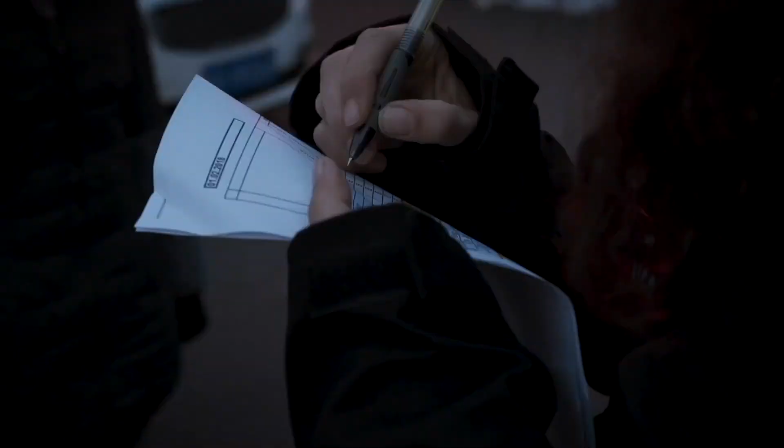This new area will include 17 buildings. Some of them will go to JNBY, a famous Chinese fashion brand. Others to Goa, a large architecture studio. Both companies will move their headquarters here.

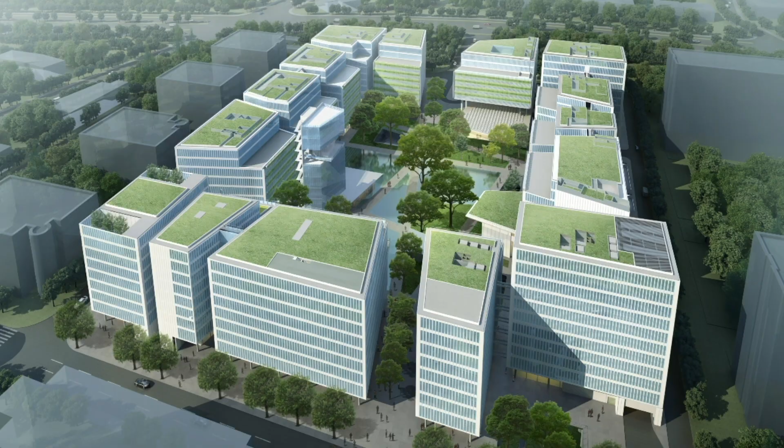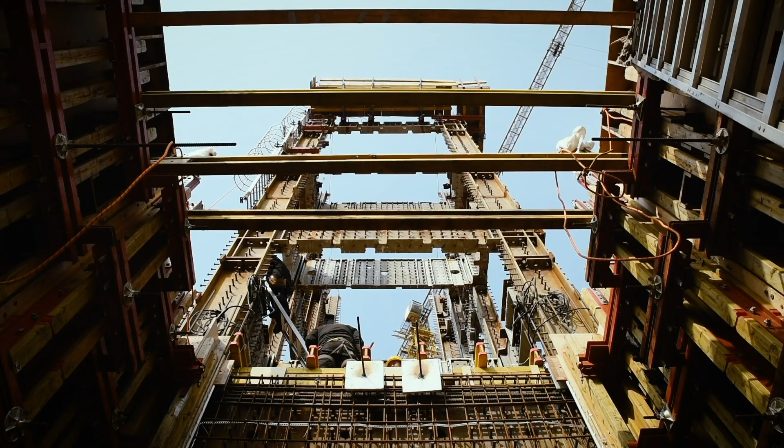I really appreciate Renzo Piano's architecture. That's why I immediately thought of him. Renzo Piano suggested using concrete for the core buildings. However, we were concerned about the quality of Chinese concrete. It was then that Renzo Piano came up with Pietro Dottor. He also said that we would meet a true maestro.

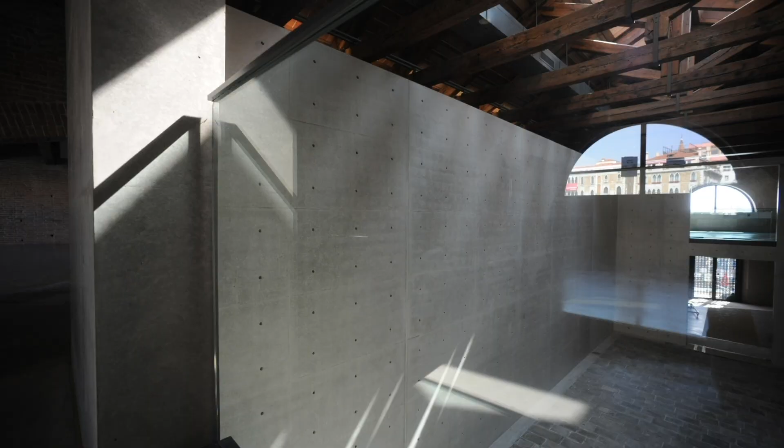One of the main features of this project is the construction of a huge architectural concrete surface. Architectural concrete is a type of architectural wall whose finished effect is visible. It was a huge challenge for Dottor Group, as the quality levels requested for this project exceeded those of the Kimbell Museum and Punta della Dogana. Moreover, Dottor Group had never carried out such a large project in the past.

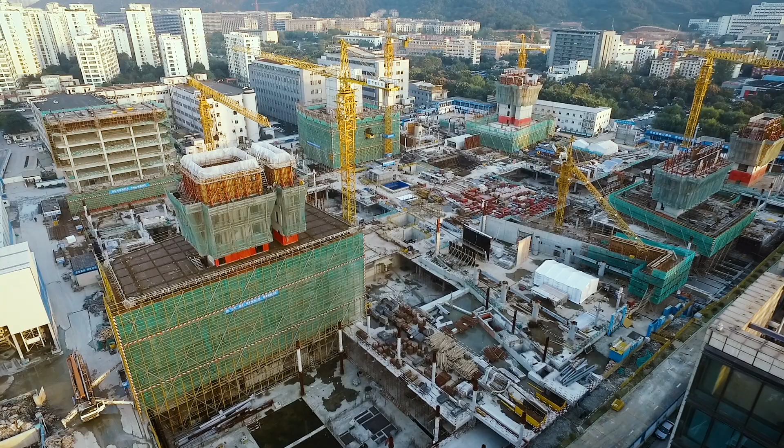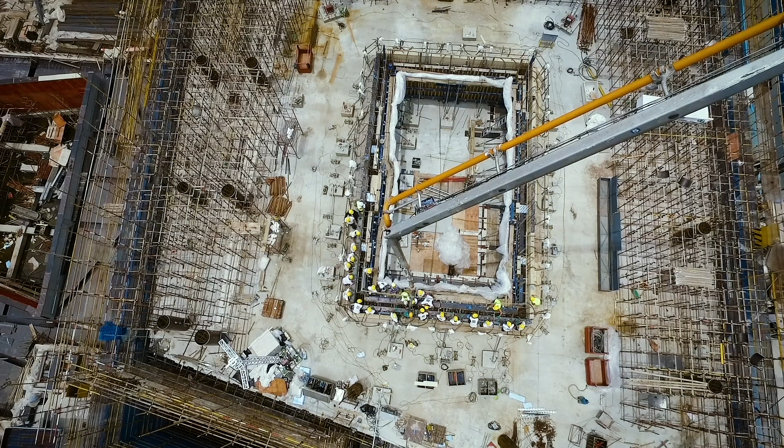In particular, this project included architectural concrete walls for a total surface of 40,000 square meters. Dottor Group had made walls measuring about 4,000 square meters, but definitely not 40,000. This was not only a matter of mere quantity. The key factor was that a 10 times bigger project comes along with a much bigger organizational challenge.

We normally operate as general contractor to manage our projects. For this one, I needed to work with my own people. We are the biggest Italian expatriate community in China, 110 men and women. We rely on more than 20 Italian Chinese translators that support our staff on the building sites.

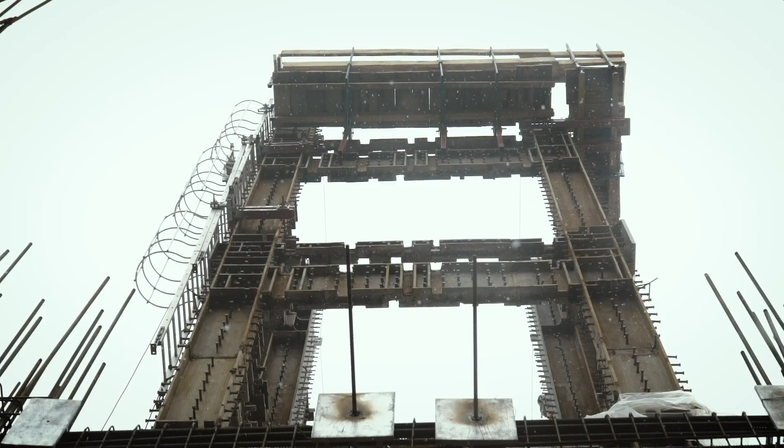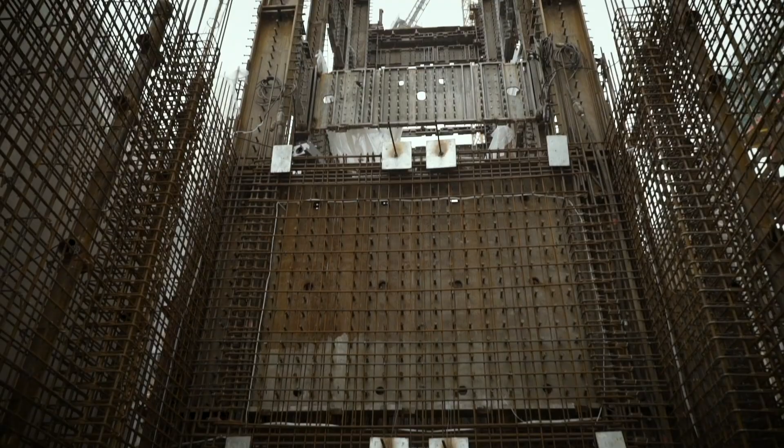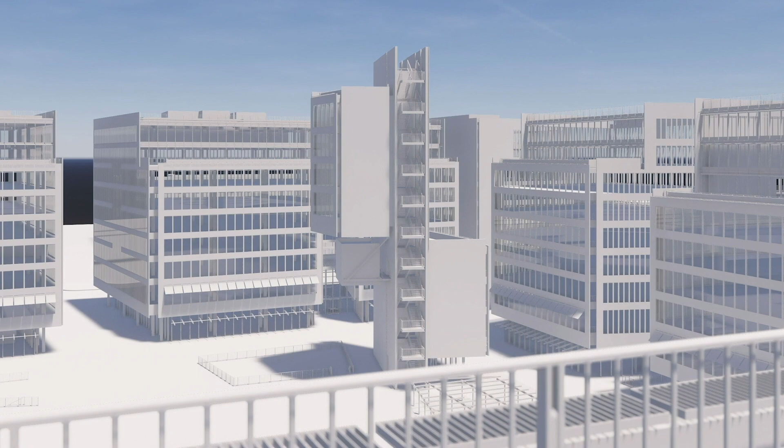From a technical point of view, I think the biggest challenge is Core E. Core E features the most complex building of the entire project. A central core sustaining a cantilevered structure consisting of 4 stories. The cantilevered frame rests on the walls of the central core. Therefore, it's vital that these walls withstand considerable traction. Since concrete has a low traction strength, we had to add quite a lot of steel to Core E.

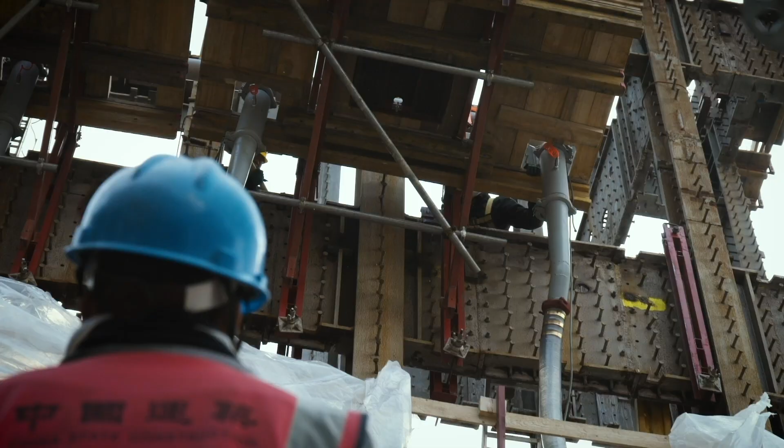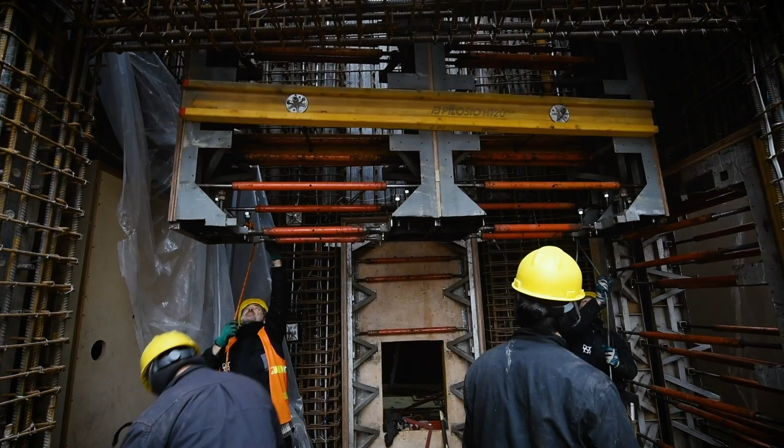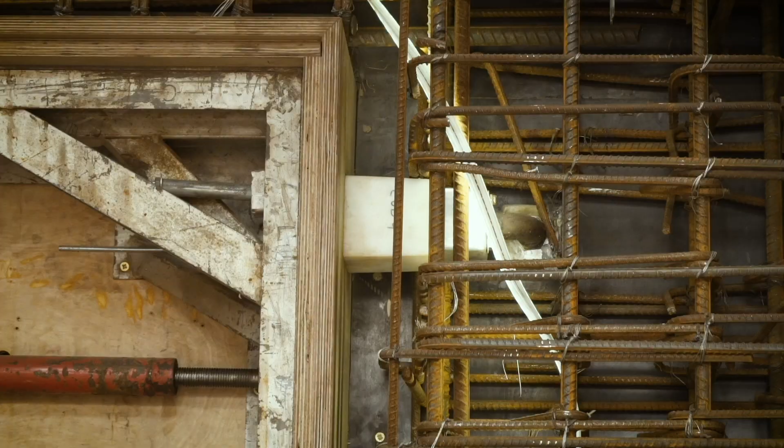This type of steel structure is very common in China. As for the exterior, architectural concrete was chosen. This was in line with the requirements of the architect and to achieve better consistency with the rest of the project. The Core E project presented a unique contradiction: a steel frame on the inside and architectural concrete on the outside. In the concrete, there are several elements: the steel structure and the reinforcement, as well as the spaces for the needle vibrators. Our engineers and structural engineers are working together to overcome this contradiction.

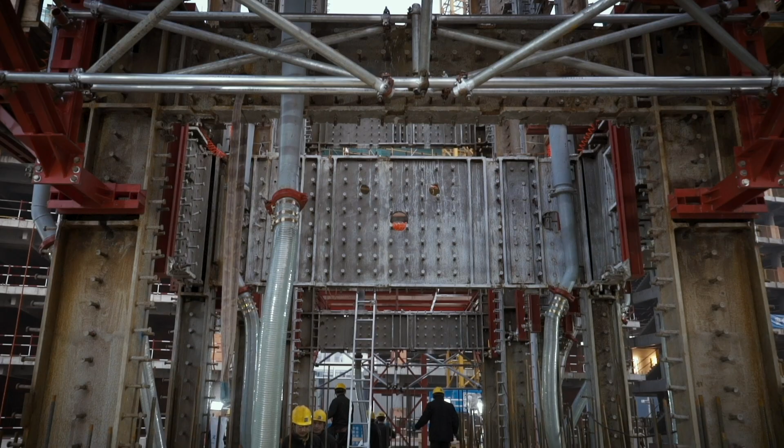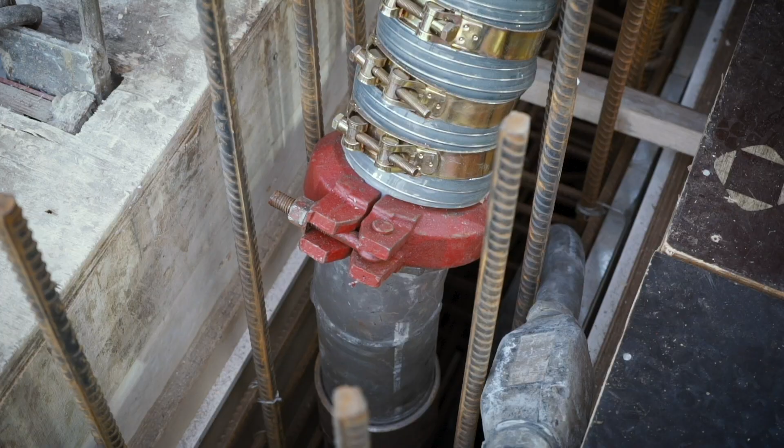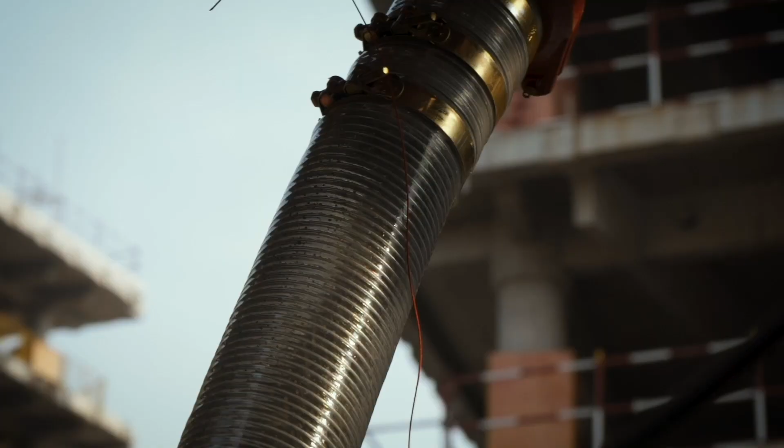It's a very difficult core. We're going to pour 150 cubic meters of concrete in one go in 3 hours. To do this, we had to patent a pouring system with pipes leading into the formwork. This allows all the concrete to be poured in one go, at the same rate all along the 70-meter-long perimeter of the building. The idea is to avoid all joints in the structure. Such challenges made for a very delicate and difficult task.

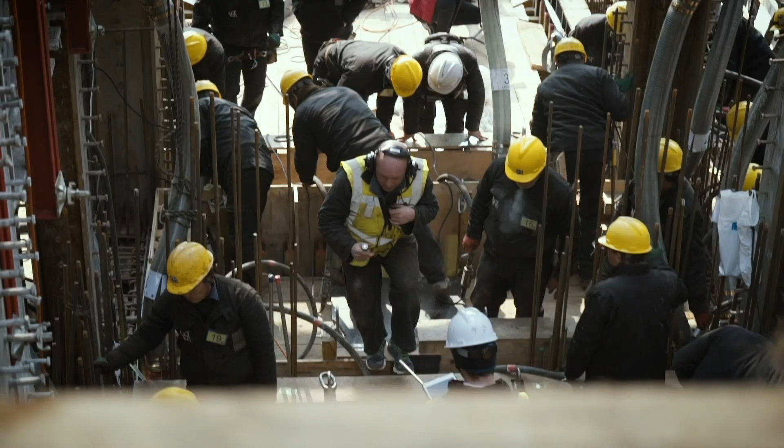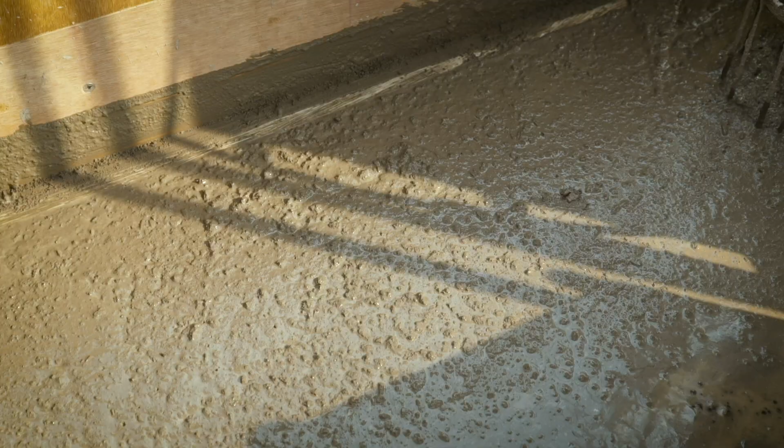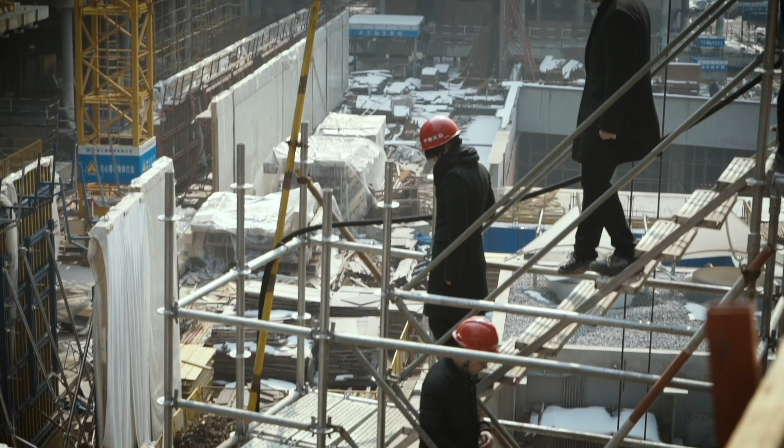Pietro is an interesting person and a friend. In Hangzhou, in these 3, actually almost 4 years, we studied and worked together on many aspects of this project. Pietro is very creative. He always comes up with lots of ideas, which he is eager to test. He is not scared of taking risks. I really like people like him.

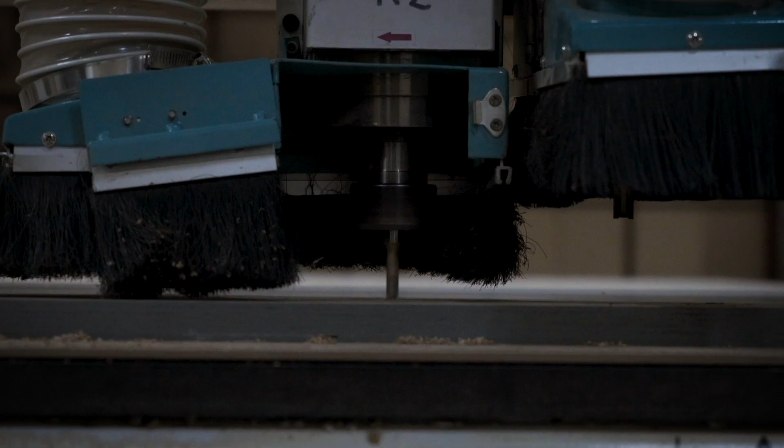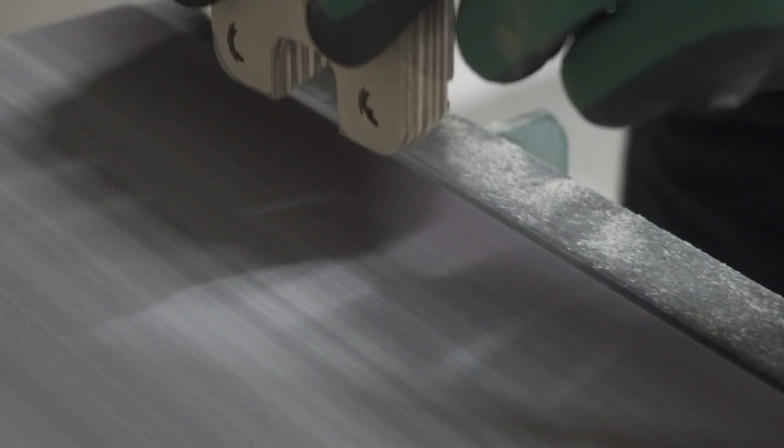The moment we take down the formwork, the whole thing is finished. No plasterers, painters, or upholsterers. Nothing else to be done. The wall will be completed. I think quality has much to do with beauty and attention to detail. Our background is restoration, that is both artistic and architectural restoration, anything that has to do with culture and history.

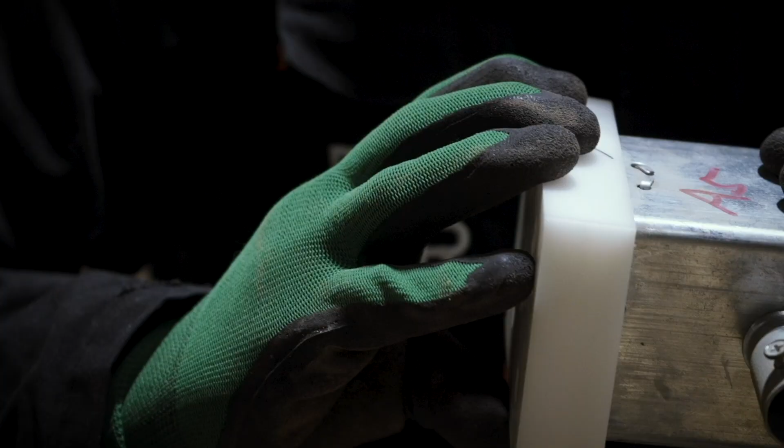Making something that requires so much attention is a very long process. Hundreds of elements working together. If one of them is off, the whole castle will come down.

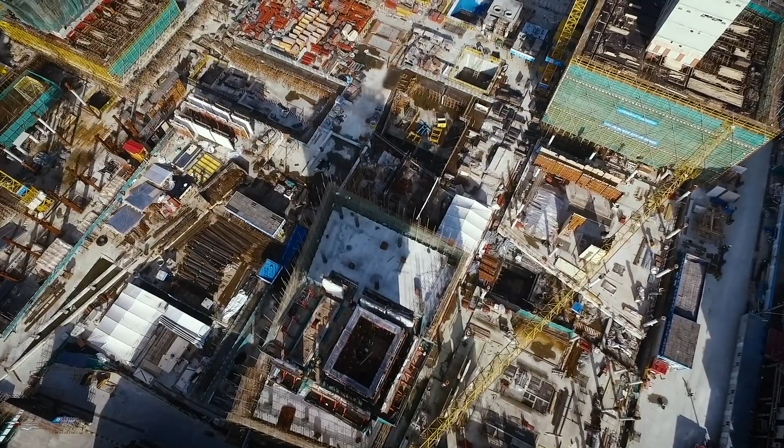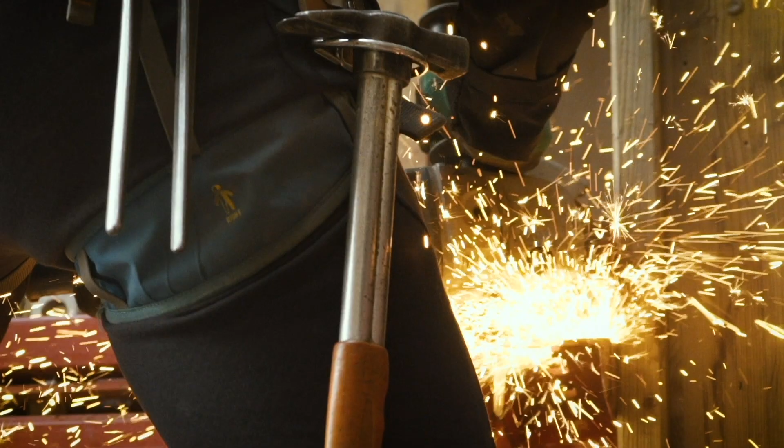Before this, everyone thought concrete structures could be centimeter perfect, but now, after this project, I think we've achieved millimeter accuracy. That is, the same level of accuracy that's required to build steel structures and facades. Both in China and in the rest of the world, this project will be considered a new milestone for the entire sector of architectural concrete. My great wish is for this project to have a beneficial influence on the construction sector of the whole city.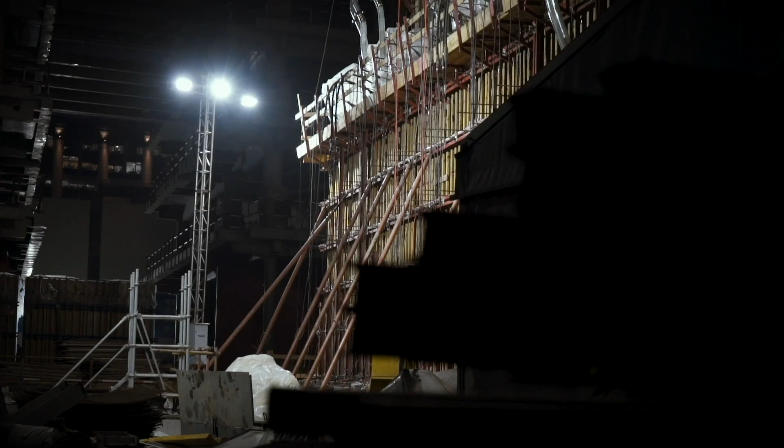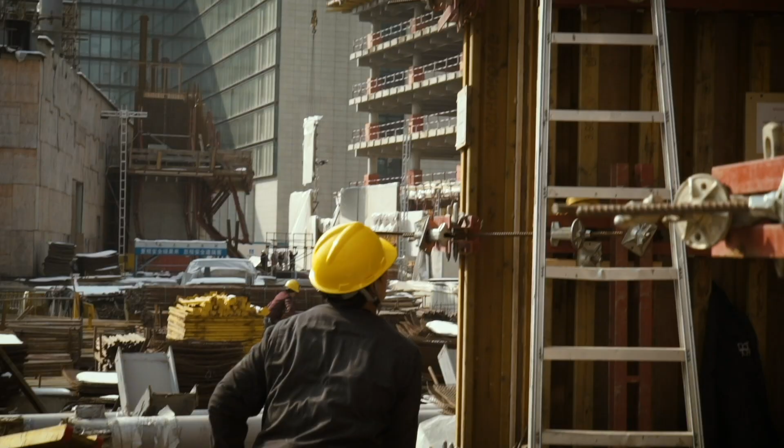The Chinese construction industry is growing fast. However, a company that works with this much attention to detail is a novelty. I think Dottor Group has given us a glimpse of what the future of Chinese construction holds for us: scrupulous work and great attention to detail.